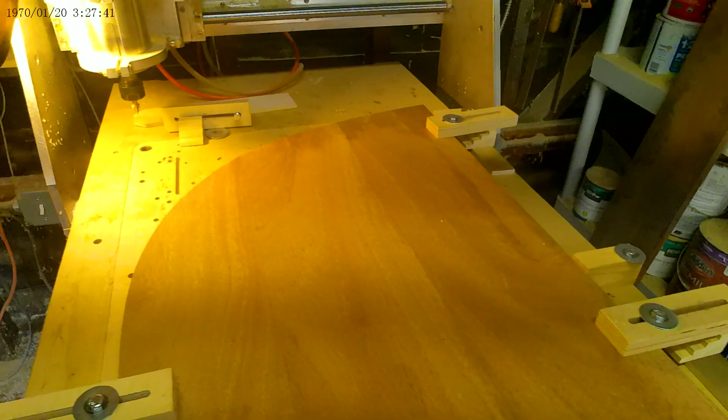And the only problem is I only have one leaf. So that means I had to make another one. So I got some mahogany and glued up a panel and used that for a template, traced it out, cut it out on the bandsaw, and then used a trim router to get it to perfectly follow the existing leaf.

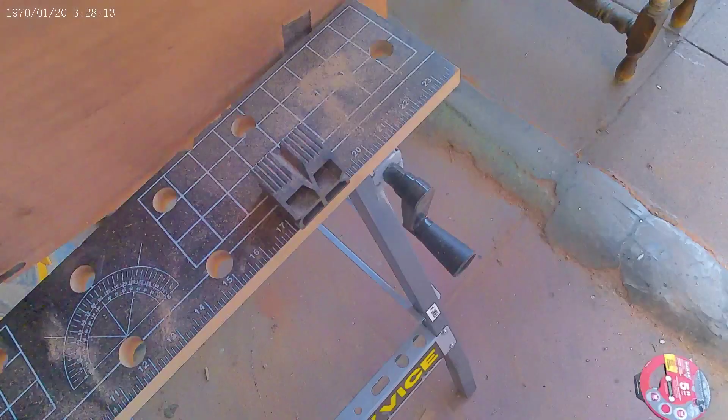And there are some edge features here that I'm just not able to duplicate. There is no cutter that I can find that's going to do this edge. So I'm going to have to do a combination of things. One is to use my CNC router and different tools to get as much material out of there as I can, and then sand the rest in, more than likely.

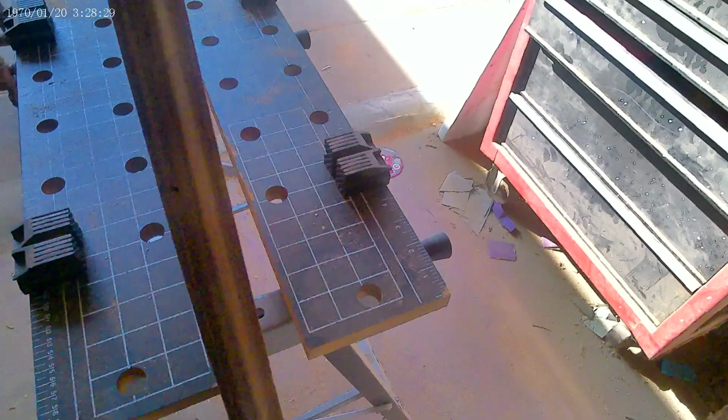But the first thing I have to do is find out what this profile is. It's not a simple arc. So I have to find out what this is. And of course, the piece that I had already cut, I'm going to set that up in the CNC router and use my DRO to find out what all these contours are, which is what I did.

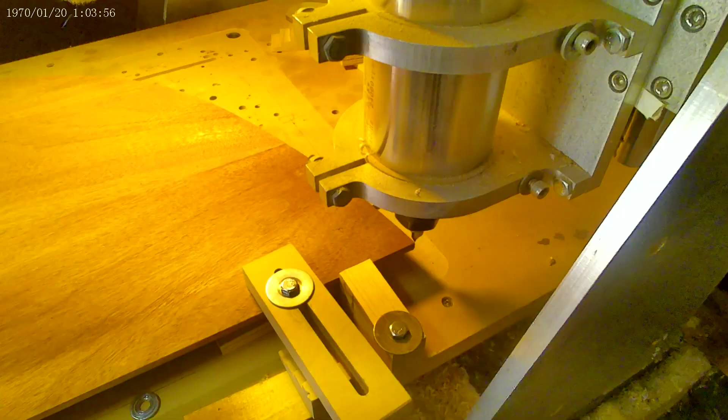So I've got a V-bit in there. It comes to a point, and I set this up so that it is right over the very top corner. And what I'm going to do is move in the Y direction 2 inches at the beginning because it doesn't change much. Then I'll eyeball it in the X direction and get that point of that V-bit right over the edge. And then I look at the DRO on my computer, and it tells me what that coordinate is.

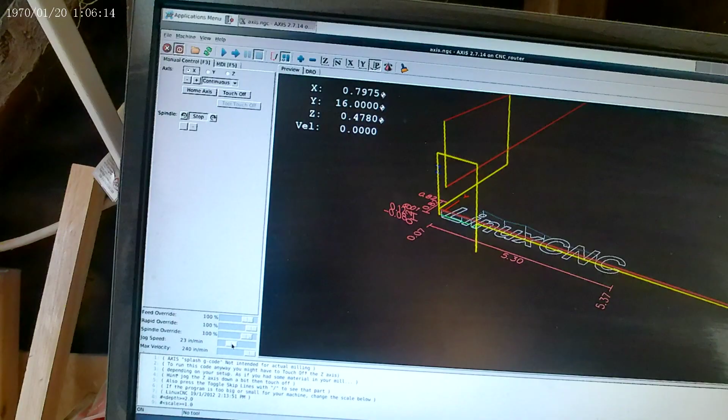And so there it is right there, the top two. That first one is 16, and then it's whatever that number was for the X. So then I just move down another 2 inches, and as I go around this thing, I get it a little tighter because the curve starts getting a lot steeper. And I want to try to keep my 3 points that I need for each arc as evenly spaced as possible. So I just keep going around and writing down my numbers, and it's kind of tedious, but I don't have another way to do it.

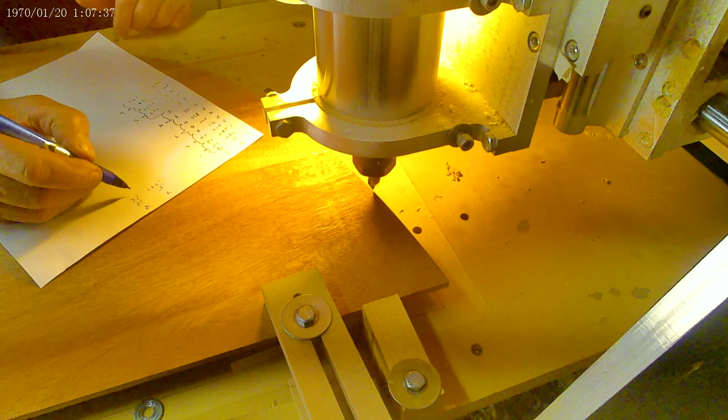And this seems like it would work pretty good as long as my eye is good enough following that edge around. But it's a piece of wood. The guy that owns this table isn't exactly looking for perfection, so he isn't going to get it. So anyway, I follow this procedure until I get all of my coordinates down. I end up with 9 separate arcs, and all of them have a different radius. Every single one's different, which is why I had to do it this way. I knew they were not going to be the same. Work my way around. This is an enlarged view of the DRO on LinuxCNC.

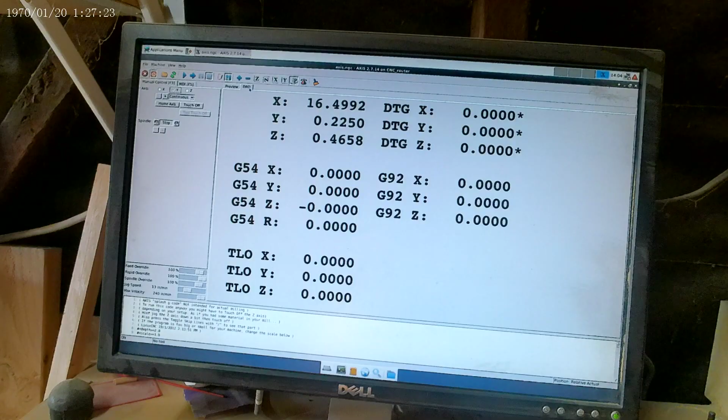Once I get all my coordinates, then I go to my CAD program, and I set it up to put in all of those plot points that I have written down on that piece of paper. That first point down there on my machine is X0, Y0. So I add a couple of lines for clarity, and then I input the coordinates manually, and I just go down the list that I created and plot them all in. And in a second you'll start to see them show up. I'm trying to speed this up. I don't want it to be too long.

So once I get all the points in place, all those coordinates that I picked up from the CNC router on the DRO, I will be able to tie those together with 3-point arcs.

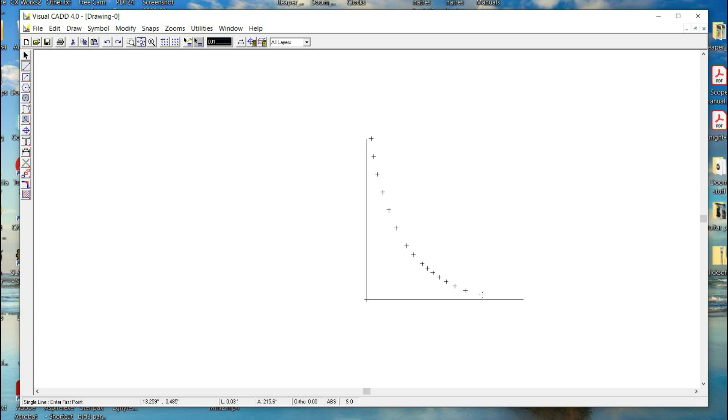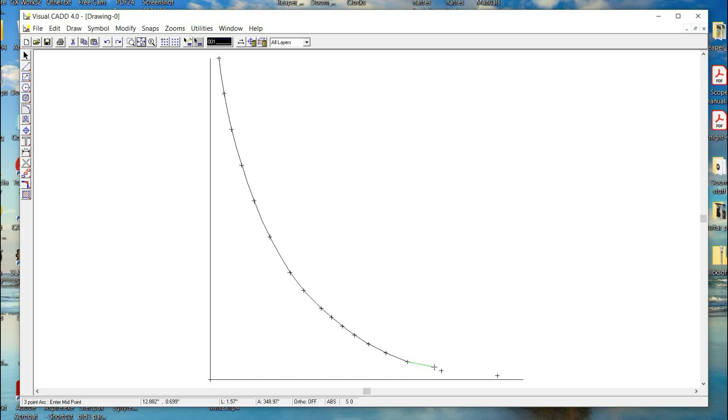And as you can see, I just do 3 at a time, starting from the last one of the previous arc, and work my way around until I have the profile complete. The next thing I have to do is add a couple more lines, and then I'm going to remove all those points. They won't work with the next thing I have to do. They have to be out of there.

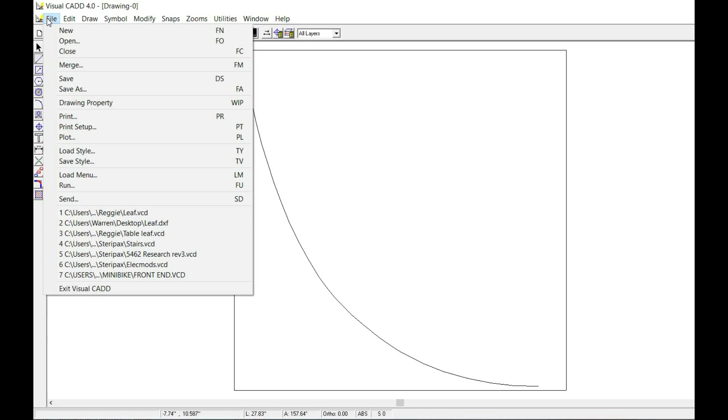So now I have to export this as an AutoCAD file, a DXF or a DWG, either one. I use DXF because the next program I'm going to use needs to have one of the two to bring this in, and it will be the CAD CAM. So I'm giving it a different file name, and I'm terrible at file names.

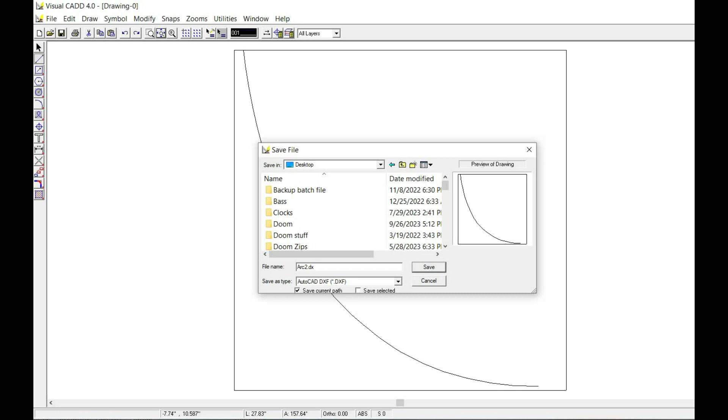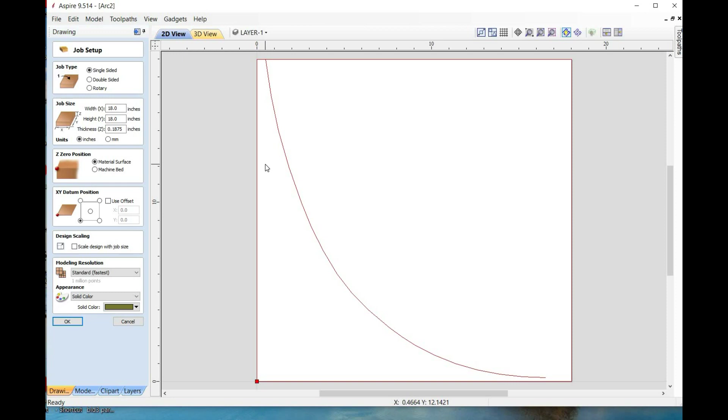So this is Vectric Aspire, and it is a full CAD CAM. I could have done this, I think, on this, but it's just easier for me to use my old CAD program. So much quicker. And then I import it into Vectric as a ready-to-go file. So all I got to do is create a toolpath, which would be a profile toolpath, which is very simple with Vectric,

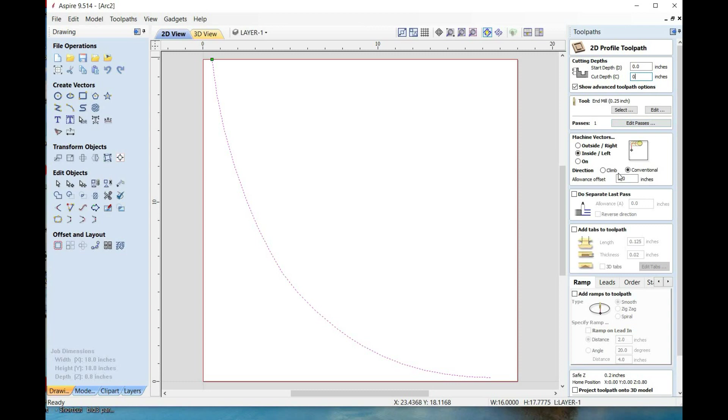and I'm going to have a 0 depth of cut because all I'm going to do with this first program is run it on the CNC machine and watch that V-bit follow that contour and make sure it's following the edge of that piece of mahogany as closely as I can. I mean, it's just a piece of wood.

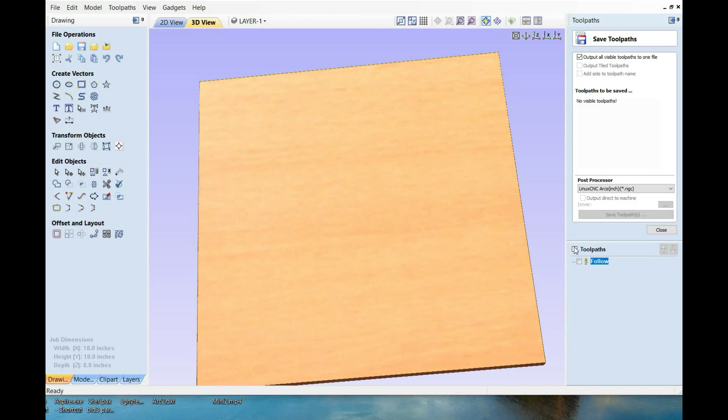So I got to do the same thing here. I have to save it where it says profile 1. I'm going to change the name of that, but that is the actual G-code. It created the G-code, and so I'm going to save that to an NGC file, which is what LinuxCNC wants. That's the type of file it wants, and I can change some of the settings in there so when it actually saves the file, it puts stuff in there that I want.

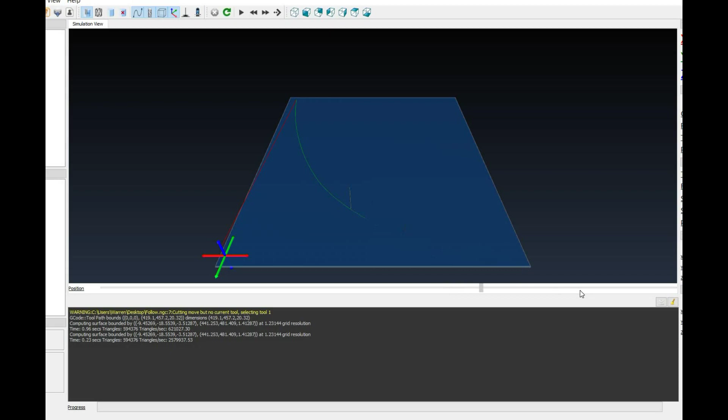So now I'm going to test it out on another program called Camotics, and with this one I can actually manipulate the cutter and follow it to make sure it's going to do exactly what I want it to do. Vectric will do that to a certain degree, but you can't really do what you can with this. So once I decide that the file is good, we'll go to the machine and I load the file into the machine.

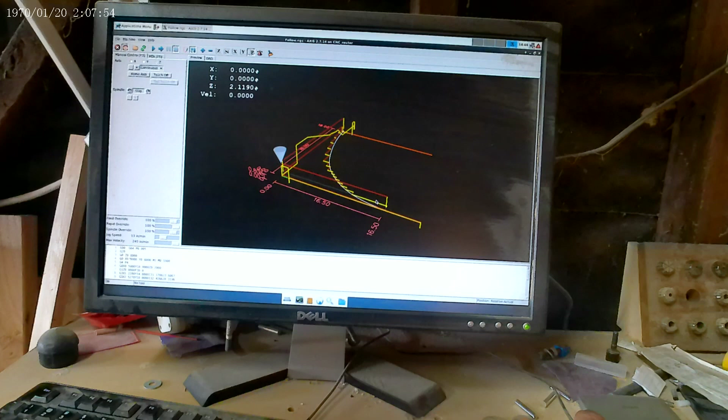And I got to find it first. I got so many damn files on this disk. By the way, this is LinuxCNC. It's an older version. I've had it for quite a while. It works fine for me. And you can see my old zigzag pattern in there for where I was locating my coordinates. So this is the arc, and I'm ready to run my follow program. So I'm going to try to get the camera in there close enough so you can see whether or not it follows that edge very well.

I'm a terrible videographer. My lighting is crap, and this camera is not a really good camera, but I'm not going to whine about the fact that I can't get a GoPro or a DJI because you have to have the right phone, otherwise they won't do business with you.

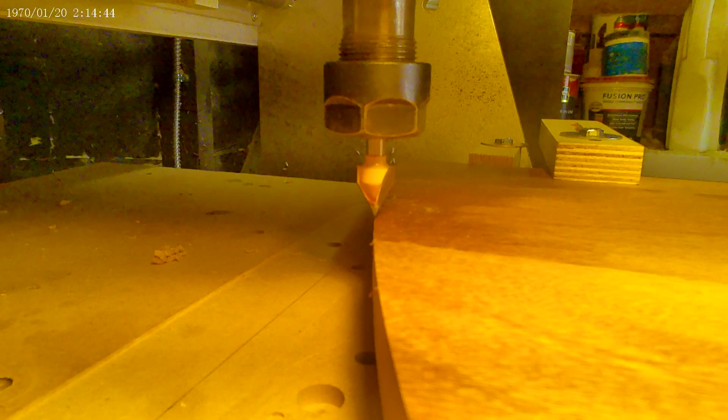Bastards. Anyway, you can see that it's following the edge of that, that's what I want. Now there's actually 9 different arcs in this sweep because they're all different. So as it comes around, I'm carefully watching.

What I'll eventually do is flip this board end for end, put it in the same position, and make sure that this same arc is going to work for the other side. I can only cut half of this table at one time because it's too long. I have 24 inches in the X, and this table's 33 inches long, so I got to make it in 2 cuts.

So when it comes around, I think it looks good enough to me to go with this, but like I said, I do have to flip this board over. Then I have to do other things. I have features on both sides of this piece of wood I'm going to use, and I can do it all with that same arc that I created. I just use tool offsets and that sort of thing to get where I want to be.

So anyway, that's how I do an uneven profile, a custom profile on the edge of a part like this one using a CNC router and the DRO.